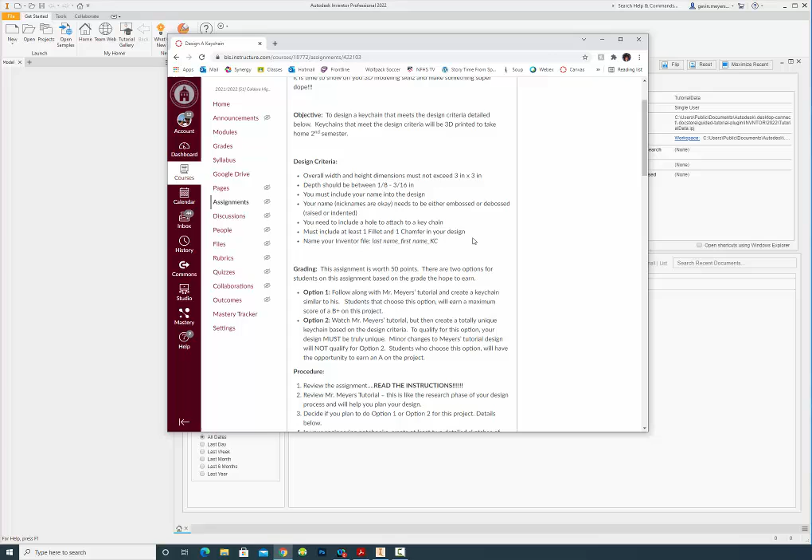So read through this as always. These funny characters here are the instructions, and you're really going to want to be able to see those and review them. I'm going to look right here at this criteria in particular right now as I begin to design, and I will show you an example of one you can do. Two options for this project.

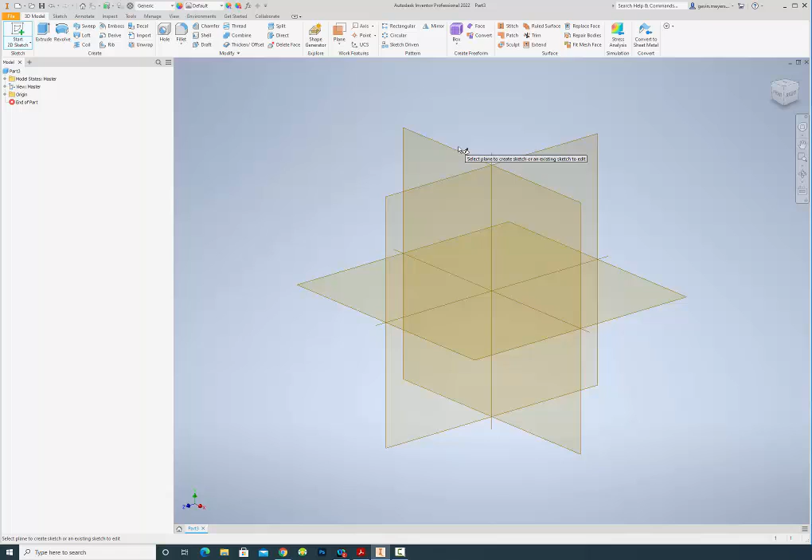This would be option, so I'll move this over. I'll start with a new part. All right, so we're going to start a new sketch. As always, I like the XY plane. I'm going to start with a rectangle, and I'm not really too concerned about the size right now because I'm going to fix that right away.

In the criteria, it says it can't be bigger than 3 by 3 inches. 3 inches is actually pretty big for a keychain, so I'm going to go 2.5 inches. And then dimension, let's see here. I think 1 inch makes sense. That seems like a good keychain size. Let me play with this, I can make it slightly different, but like that, I think that'll work.

As I look at it, I'm going to try 0.75, see if that looks better. Okay, so we will finish this sketch.

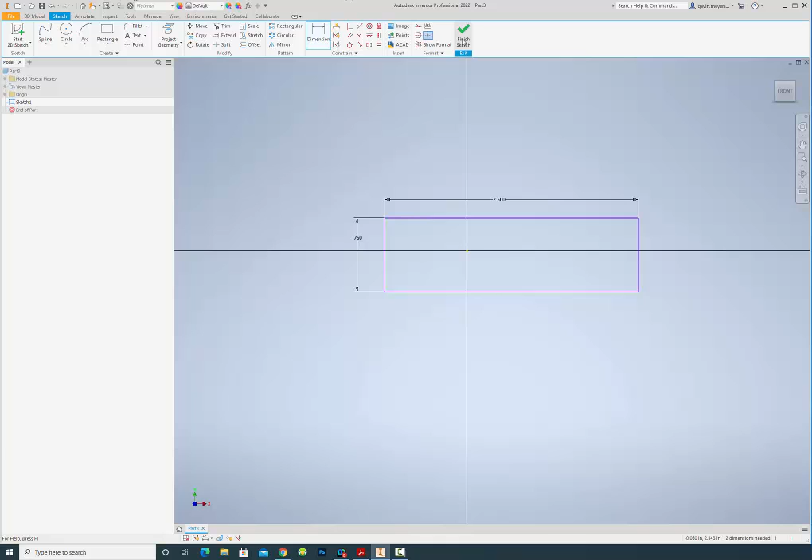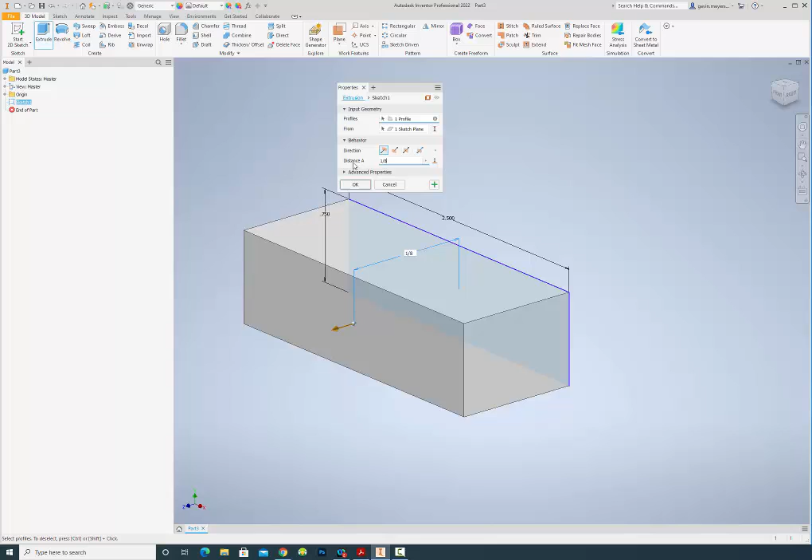Okay, now we need to have a thickness no greater than 3/16 of an inch. So we'll extrude this, I'm just going to go with something less than 3/16. Okay, and now I have a decent shape here that I can use.

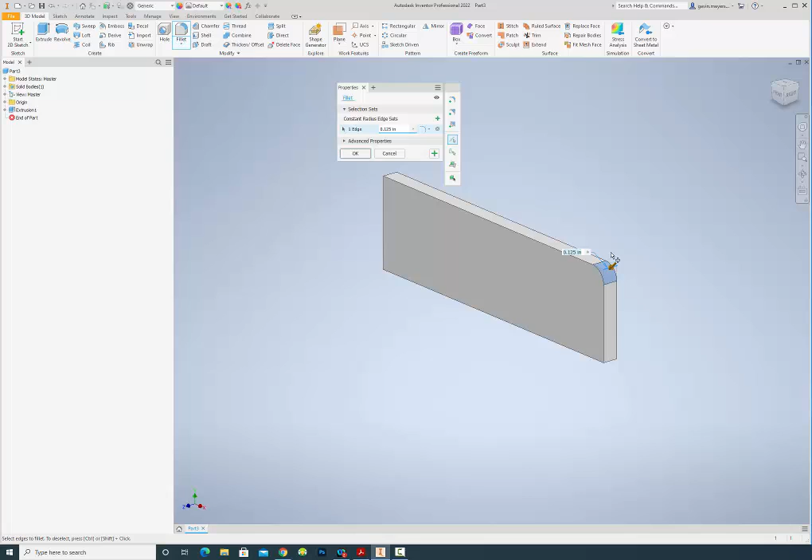As I look at it though, I want to fix some things right away, so let's fillet the corners. I could have done this in the sketch, or I could do this three-dimensionally. I'm going to look at this straight on. 0.125 doesn't look like enough, let's try 0.25.

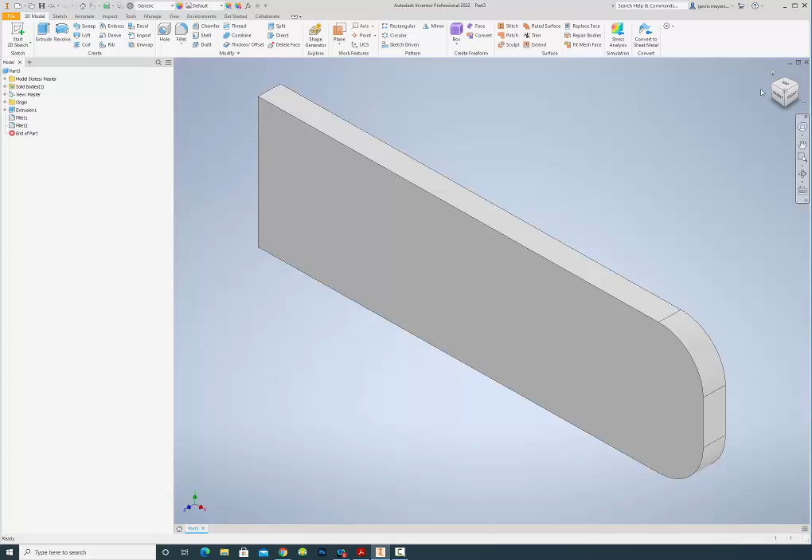We'll do the same to here, this. And I'm going to use a new tool, I don't know if we've used it yet, called the chamfer tool. So let's use chamfer, I'll chamfer the edges on the front side. Let's try that 0.25 again, see if I like that. And front view.

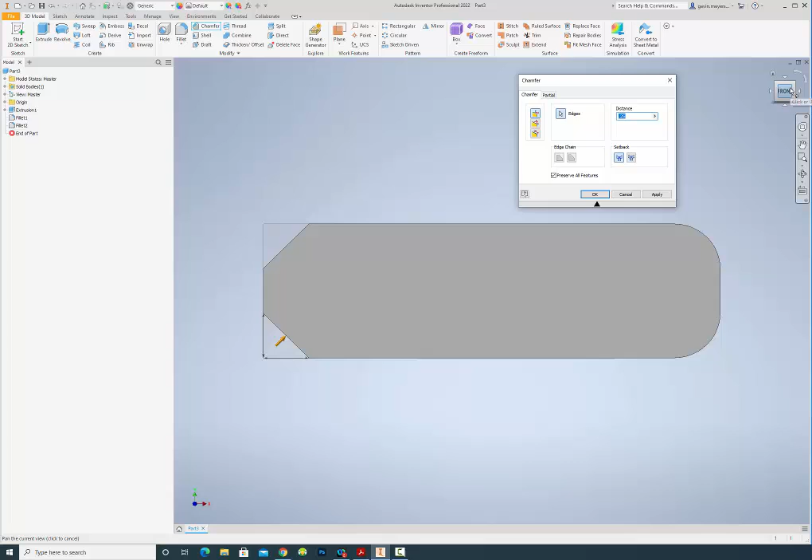Looks pretty good to me. I'll say okay, and now I've got kind of the start of my keychain.

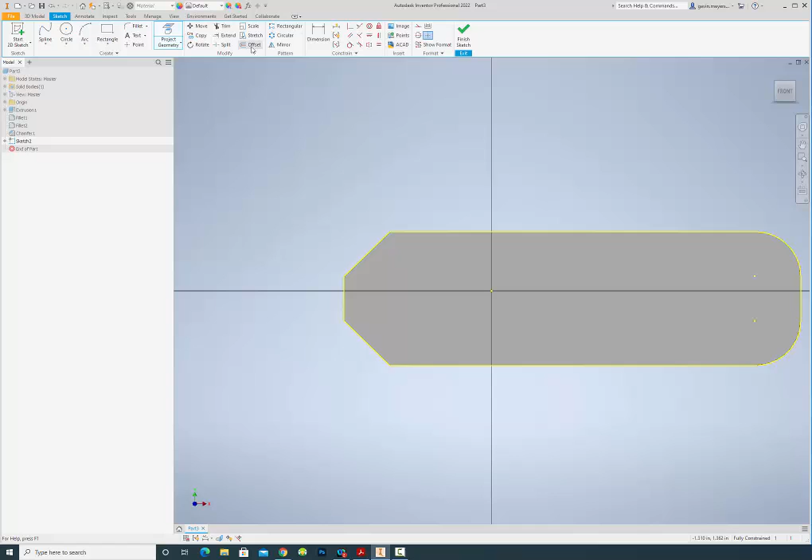I'm going to start a new sketch, we're going to put a little outline on this keychain. So let's go ahead and do a new sketch, and I'm going to use the geometry tool because I want to use this existing geometry. So that should give me an outside edge, and then I'm going to use the offset tool. So click, I don't know.

I want to make that a good dimension, a consistent dimension, so let's go like 0.05, sounds pretty good. See, maybe we'll change that later.

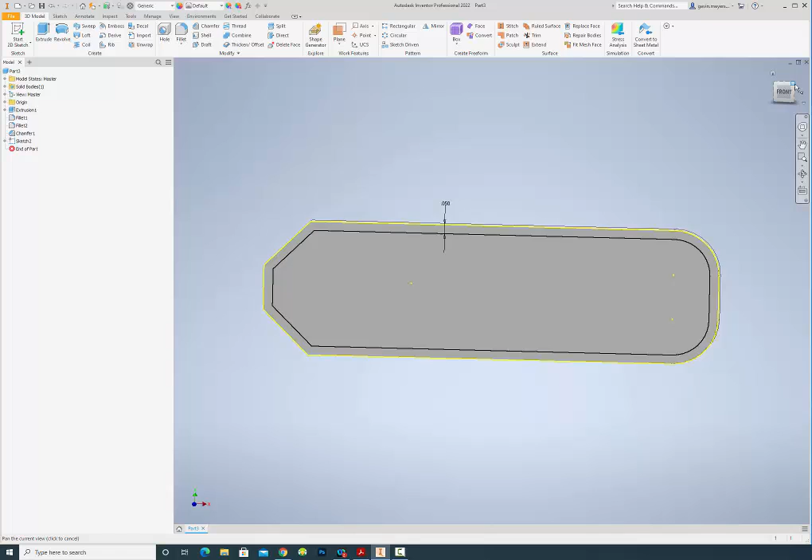Okay, and now we're going to go ahead and extrude this here. And remember, I can't go beyond 3/16 of an inch. I've already gone 1/8, 1/8 is the same as 2/16. So I think of my distance here, let's do 1/16. Okay, so now that should be my full depth of my shape.

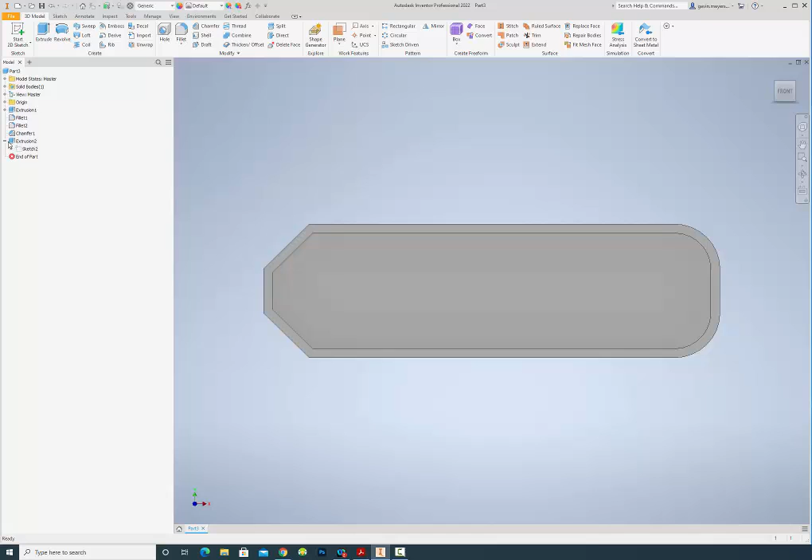As I look at that, I'm kind of feeling like it's not enough, so I'm going to edit this, something else. So I'm just going to expand my extrusion, go to sketch 2. If I hover over, I can see that that's the sketch I want to edit. Double click on it, I'm going to try and change this to 0.1. Seems like a little better there, and I'll show you why here.

So now I'm going to come in here and make some edits to it. I'm going to come back to this chamfer tool, and I want to chamfer the edges. I don't want these hard edges, so I'm going to go 0.05. And that's going to be too big, I can see right away that's too much. It's starting to give me some issues, so I'm going to cancel.

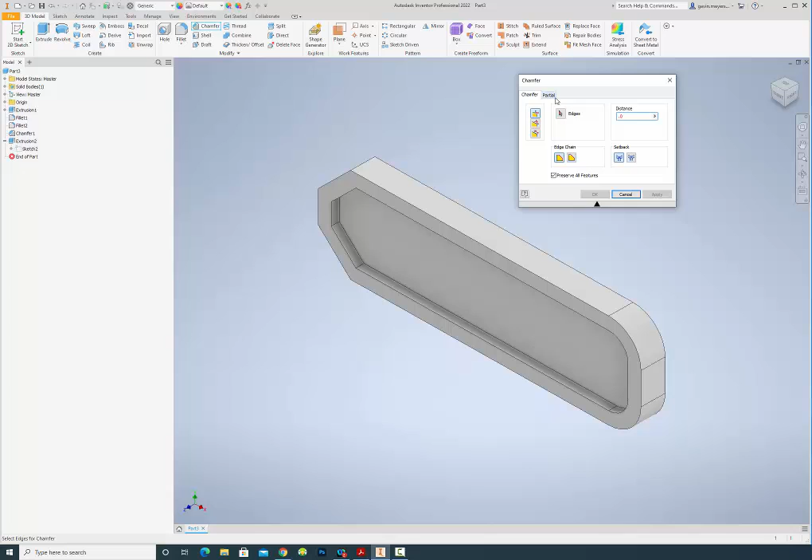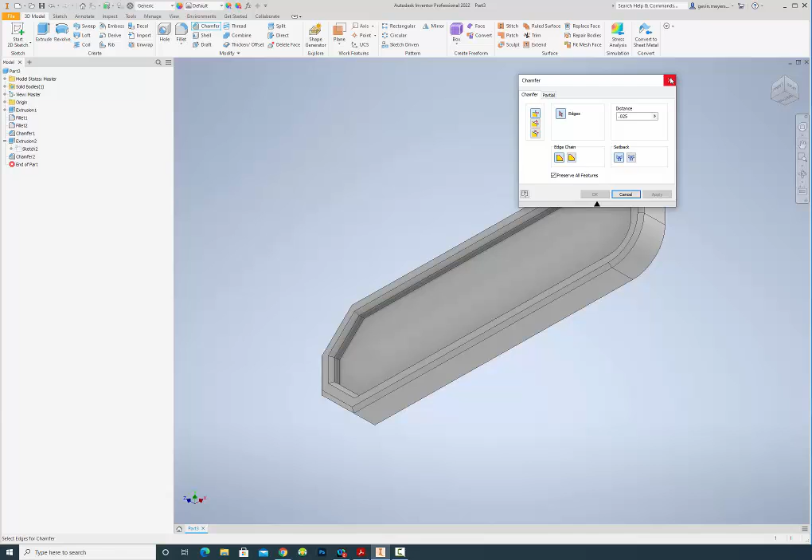Let's go chamfer again, let's change this to maybe 0.025. That's starting to give me a better little chamfer there. It's not too big, it's going to kind of soften my edges a little bit. I'll hit apply. Look at that, that's looking like a pretty good little keychain.

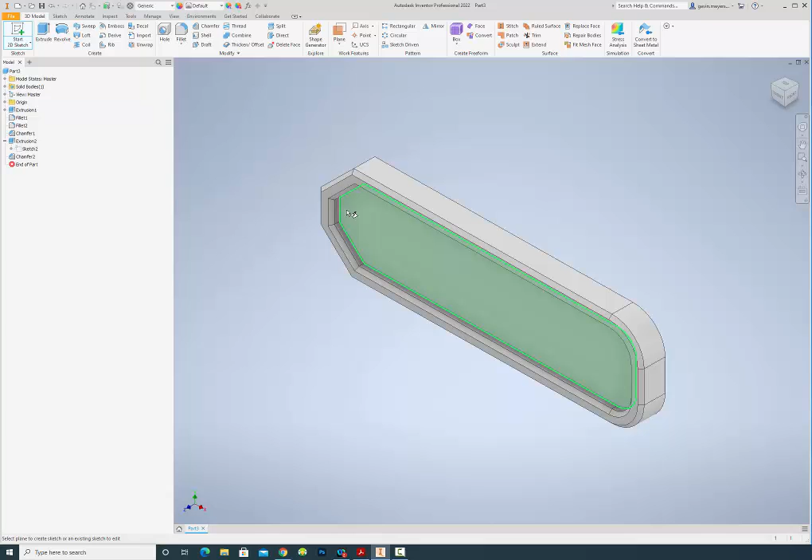All right, a couple other things we want to do. Let's go ahead and put some text in here, so I'm going to go new sketch, I'm going to sketch on this plane. So again, I want to get, if I look at it three-dimensionally or isometrically, I want to get it on this inside, that's what I want to draw on. Okay, I'm then going to use the text tool, put in a name.

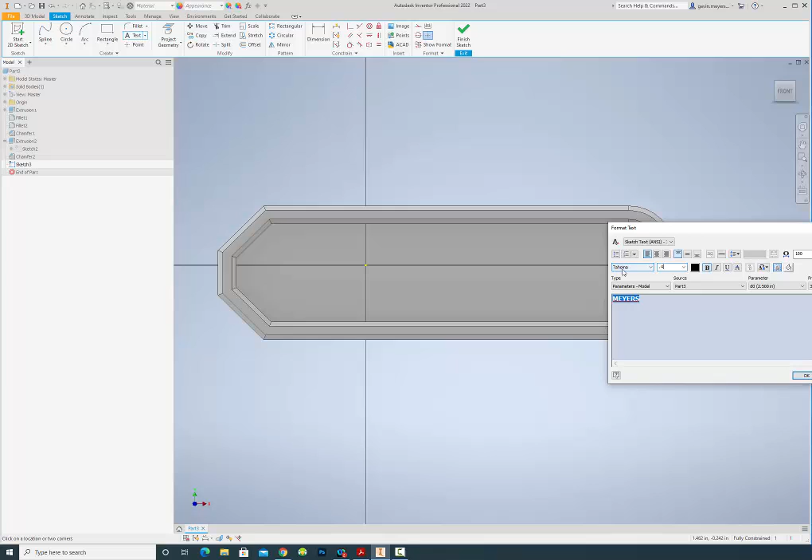Stick with Tahoma, you can change to anything you want. I'm going to go selecting, I'm going to go bold. And I played with it a little bit, so I think a 0.4 might be a good size. Ah, that's too big. Okay, that's fine. And I'll just double click on this.

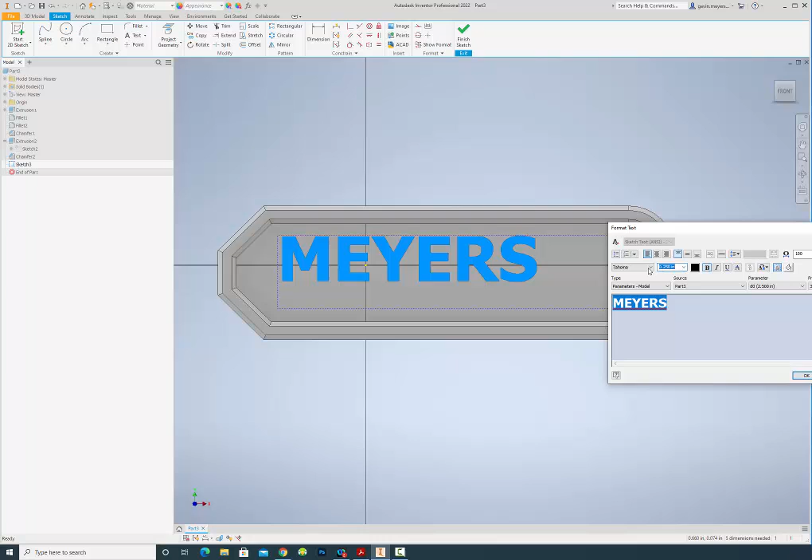Let's go 0.25. Let's see if that's not big enough. So I'll double click on it again. Let's see, probably select it. 0.35, okay, this would be good.

I'm going to move it a little bit to where I think it's kind of centered and I like it.

Yep, all right, let's emboss it. I'm going to go with that, 1/16 profile. Should be popping out this way, and emboss is what I chose.

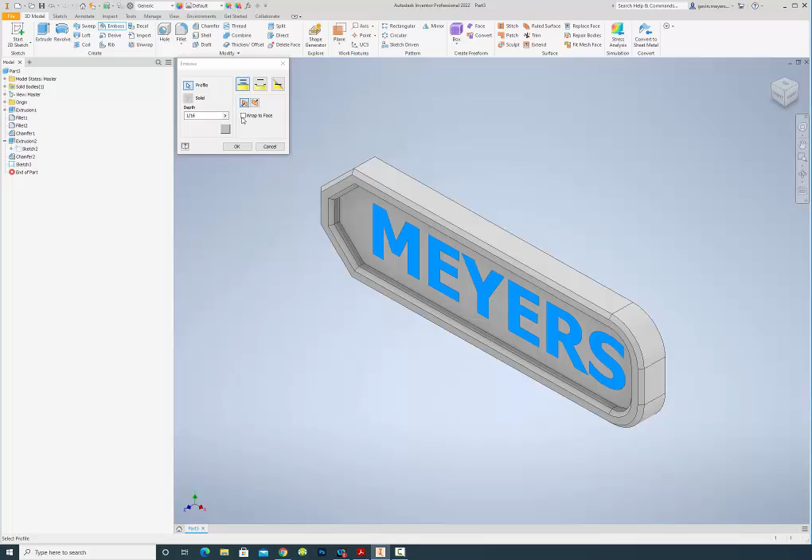Let's see, there we go. It's looking pretty good. Okay, like that, like that. Let's see, I might even put that a little bit, kind of look at it. Yeah, all right, all right.

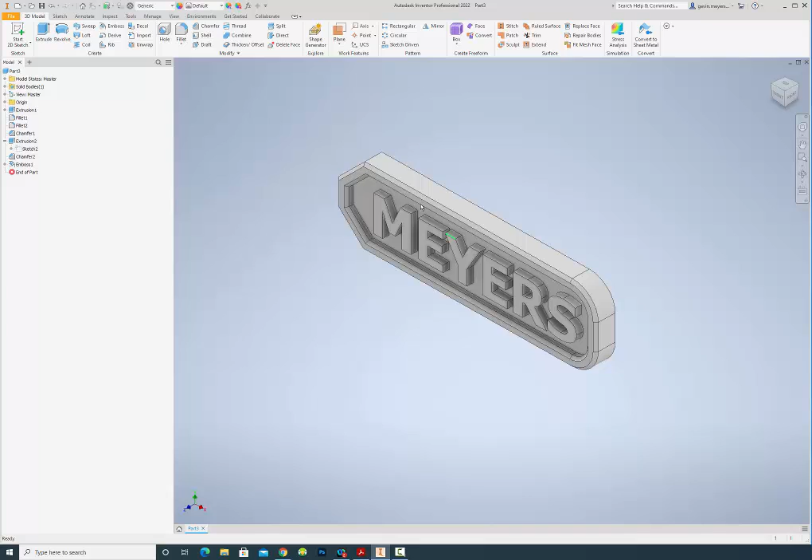I might play with this a little bit, and this is kind of more of an option. I don't even know how much of a difference this will make, but I might play with this chamfer tool a little bit. Let's say I go with 0.02, and maybe if I want to chamfer these letters, it might not work. I might not like it.

Honestly, not sure how it's going to work on the rounded edges, but I could. Well, yeah, so then I can hit apply. It won't take me out of there, but I can see now the M is done.

I'm gonna skip straight to the S to make sure I'm gonna get the S. I want to do it. That curve, I need to play with it a little bit more. That looks good. Apply. Yeah.

Making that chamfer, so I'm gonna keep going. I lost my edges. There we go. The inside of this R. Apply.

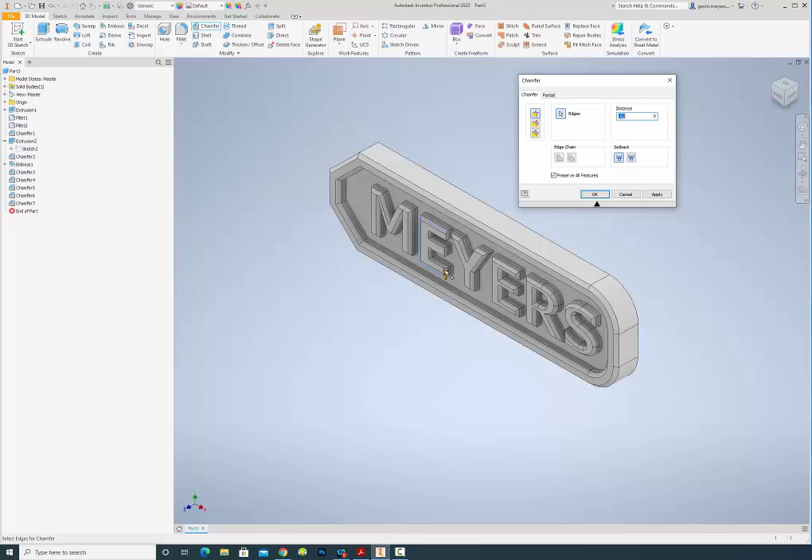Apply. And this part, you may like this look, you may not like this look. It's not that big a deal. Cool. And there is no requirement that you do need to use the chamfer. Well, you might want to get it in there.

Cancel. I'm done. Okay, it's looking pretty good. Almost done, except for, of course, if I'm doing a keychain, I have to have a way to attach it to the keychain. So we're going to do another sketch. I'm going to put it again on this face here.

Okay, and I'm going to just draw a circle. Now, I could just randomly put a circle in some spot, but that's not what we're engineers. It's not what we're doing. We like precision. So I remember that I made this 0.75. So I'm going to select my circle.

I'm going to select the top edge of this. I'm going to pull this out. 0.75, what's half of 0.75? That's a lot of math. So I'm going to go 0.75 divided by 2. Okay, and that should perfectly center my circle.

Now I may not like how close that circle is to that edge. So let's pull this part. This would be a little bit more of a 0.3. Let's see. Oh, sorry, I don't think that spot.

Well, let's give the circle dimension before we get too deep into this. Let's go. Good.

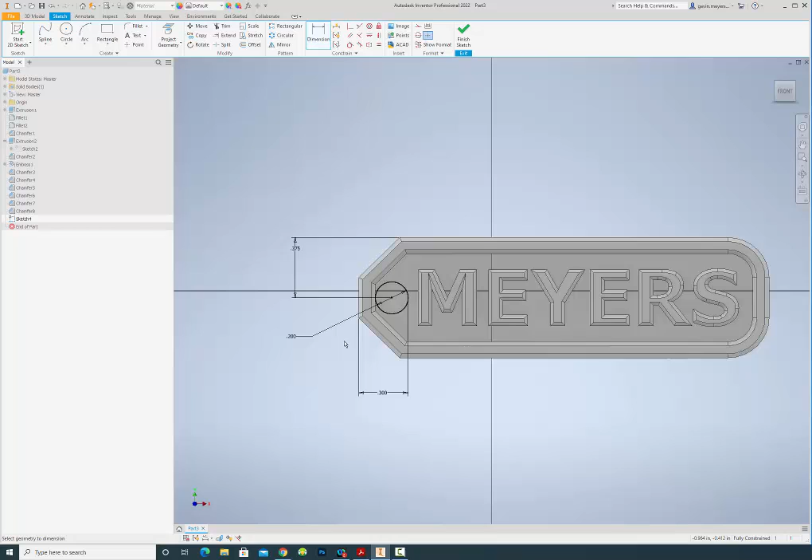But I'm not loving it, and I'm going to delete this dimension because you can see that I don't like the way that dimension is. I want to go to the center of the circle to here. That's 0.2 right now, I'm not loving that either. Let's go 0.25. Oh, that looks too close to my thing. So let's go, we'll split the difference.

Point. Size, you don't want to get too small in this size. I wouldn't go any smaller, but I might play with it for a minute. 0.15. I'm going to go back to, I think 0.15 is pretty small. I'm going to go back to it.

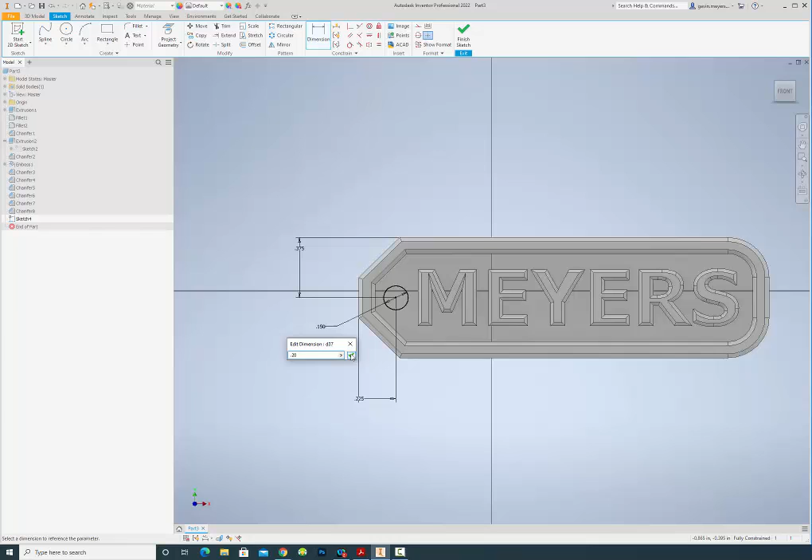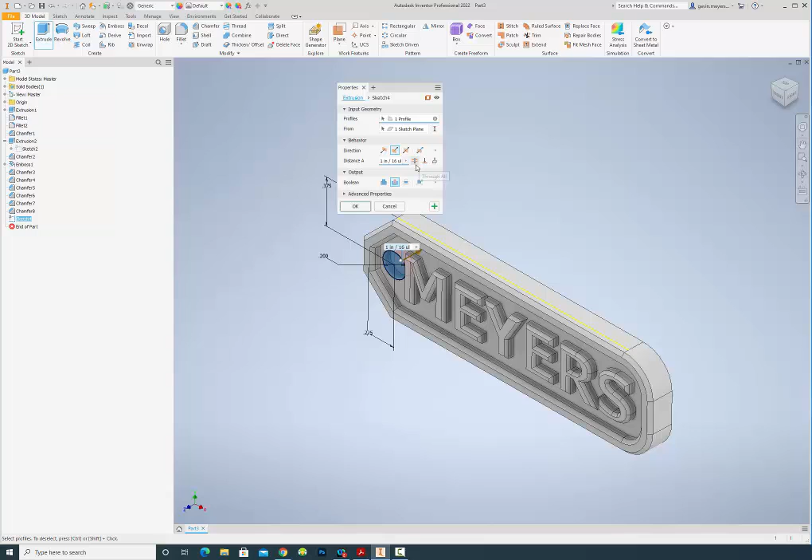Just like everything else, I'm going to do an extrusion. This time I'm not going to do create a join extrusion, I'm going to do a cut. And it's going to ask me my distance, and instead I'm just going to go through all right here. I'm not going to have a distance. Hole in there, perfect for my keychain.

So Meyers keychain, I thought I needed to move my text. I could have gone back and found, well, my text is right here. Again, if you just hover over it, you'll see it. So my text was, there it is, right there under Emboss, Sketch 3.

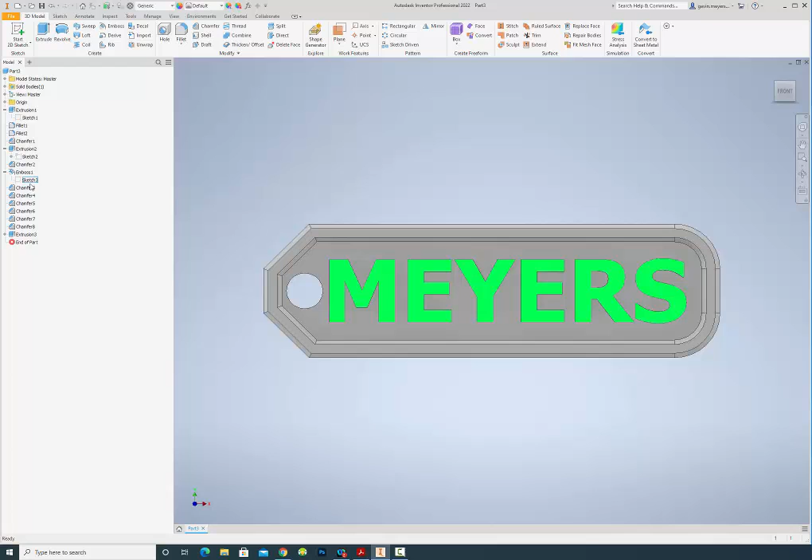Okay, I could have double clicked on that. I could have moved it in here.

All right, that is how you create a keychain. Remember, you can do it this way, or you can get creative and do your own for more credit. All right, enjoy.